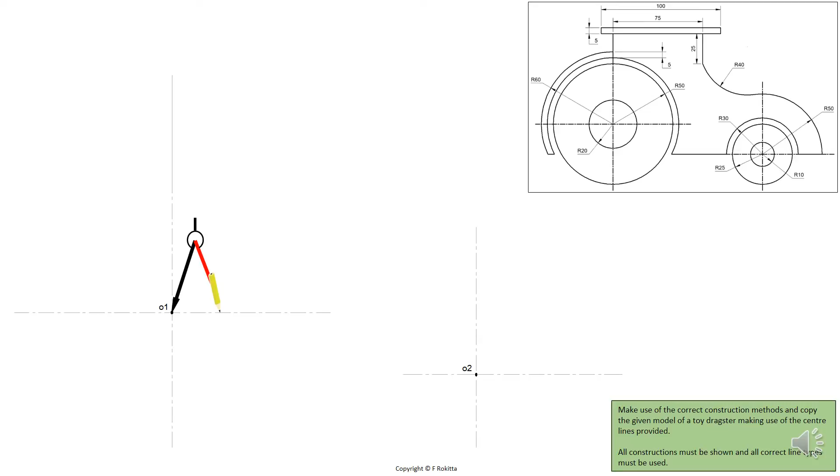Place your compass now at O1 and stretch it to a radius of 20 mm, which will represent the inside of the back wheel. Draw a solid circle. Place your compass once again at O1, stretch it to a radius of 50 mm and draw a solid circle that represents the outside of the back wheel.

With the next dimension, we need to make a small calculation. We see on the schematic that the outside rim of our hubcap is 60 mm. Then there's a 5 mm gap between the outside edge and the inside edge of the hubcap. That means we will need to draw a radius of 55 mm for the inside hubcap.

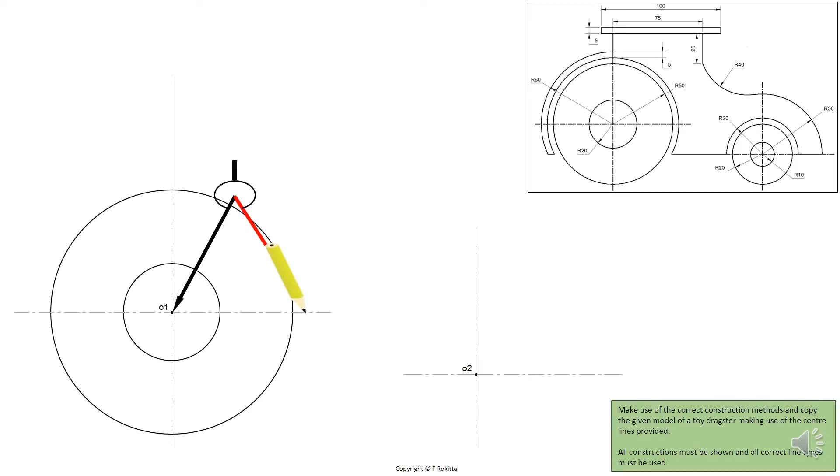Therefore, we are going to place our compass at O1, stretch it to 55 mm and draw the inside of the hubcap. Now we need to draw the outside edge of the hubcap, which is a radius of 60 mm. Place your compass now at O1, stretch it to 60 mm and draw the outside edge of the hubcap.

The next step is to place our compass at center point O2. Stretch it to a radius of 10 mm and draw a solid circle that represents the inside of the front wheel. Place your compass at O2 once more, stretch it to a radius of 25 mm as seen on the schematic, and draw a solid circle that represents the outside edge of our front wheel.

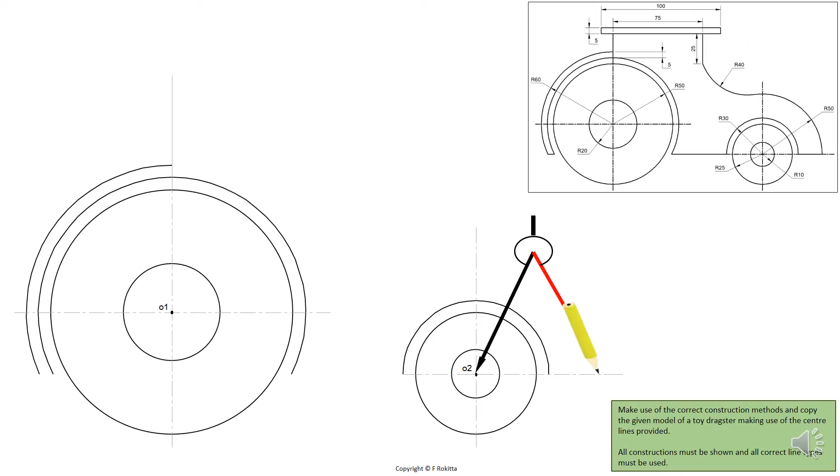The next step is to place our compass once again at O2, stretch it to a radius of 30 mm to draw the half circle that represents the inside of the hubcap of our front wheel. Also note that the half circle starts on the horizontal center line on both sides. The next step is to place your compass at O2 once more, stretch it to the full distance of 50 mm as shown in the schematic, and draw the front bonnet as shown here.

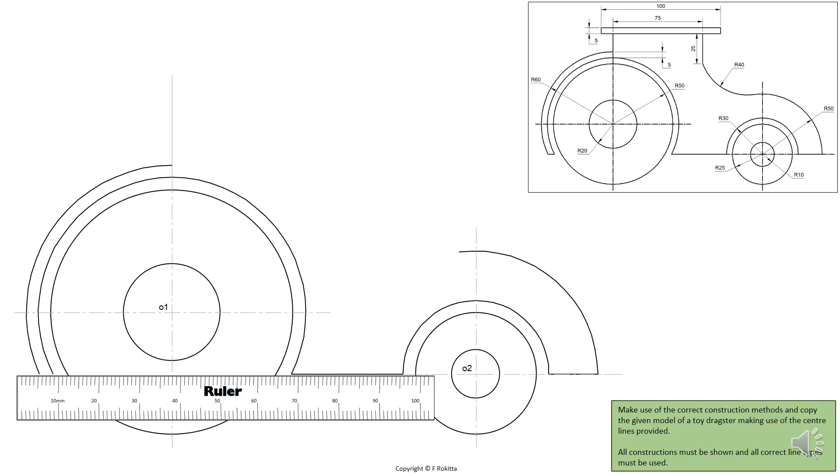Align your ruler with the horizontal center line of the front wheel and draw in the lowest end of the body of our car with a solid line. Also close the gap at the end of the car with a solid line. With the next step, we need to align our ruler with the horizontal center line of the back wheel. Also the set square with the vertical center line.

In order to draw the vertical line of the canopy at the back, we need to make a small calculation. Look at the 2D schematic view and see that the front height of our canopy, which is the total height of the canopy, is 25 mm. The back end of the canopy is only 20 mm because we needed to deduct the 5 mm between the wheel and the hubcap. Therefore, we need to draw, as shown here, a solid line with a height of 20 mm.

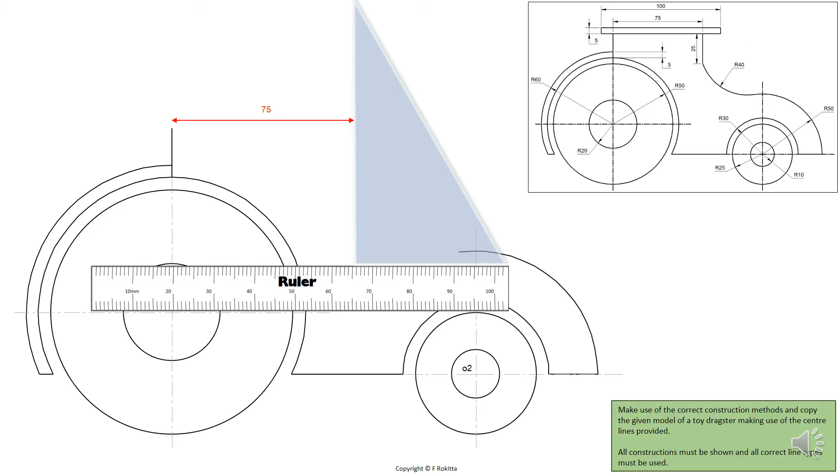The next step is to measure 75 mm with our ruler from the back line of the canopy to the front end of the canopy. Draw a solid line as shown here, 75 mm in between. Now that we have determined the front and back end of our canopy, as well as the height of the canopy, we can place the roof.

In order to place the roof, we need to halve the 75 millimeters, which is the total width of our canopy. This will give us 37.5 millimeters. From this, we will place a mark and measure 50 millimeters to the left and to the right. This will give us the total length of the roof, which is 100 millimeters. Then we will need to draw a height of 5 millimeters for the roof, as shown here.

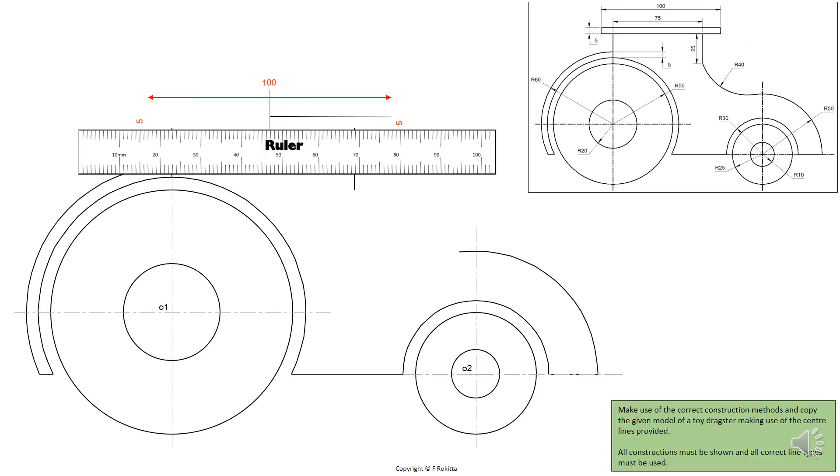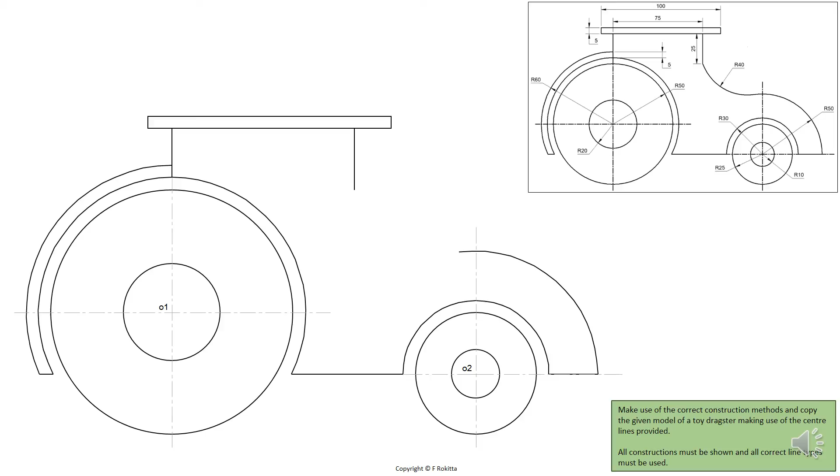To complete the final stage of our drawing, we are required to construct a touch arc. On the 2D schematic preview, we see that the touch arc has a radius of 40 millimeters and that it reaches from the bottom end of the canopy to the outer edge of the bonnet. To start the construction, we need to place our compass at the bottom end of the canopy, stretch the compass to 40 millimeters and draw a light construction arc as shown here.

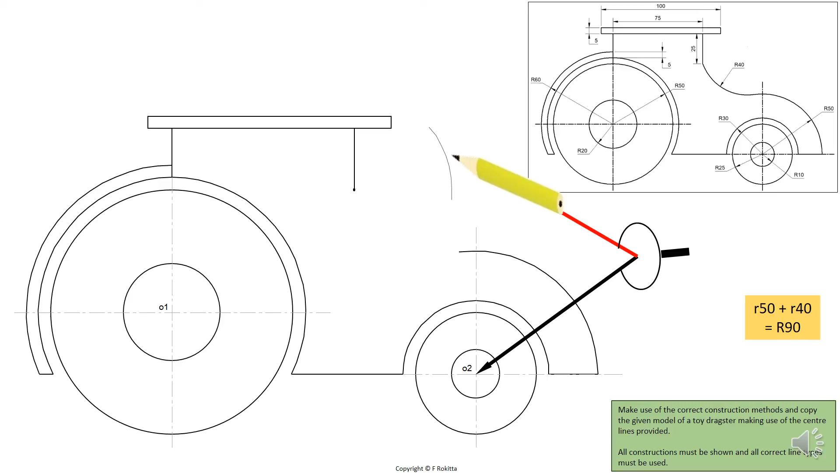With the next step, we need to make a small calculation. The touch arc is excluded from the bonnet and therefore we need to add the radiuses to one another. We need to take the radius of the bonnet, which is 50 millimeters, and the radius of the required touch arc, which is 40 millimeters, add them together, and then we have a total of 90 millimeters. Place your compass now at O2, stretch it to 90 millimeters, and draw a light construction arc as shown here. This arc needs to intersect with the previous one, and this will create a new center point.

Now, before we draw the final touch arc, we want to show where exactly the touch arc will meet with the bonnet, and therefore place your ruler at O2 and align it with the intersection as shown here, and draw a light construction line. Finally, we place our compass on the intersection and stretch it to a radius of 40 millimeters and draw the final solid arc. This will complete your construction.

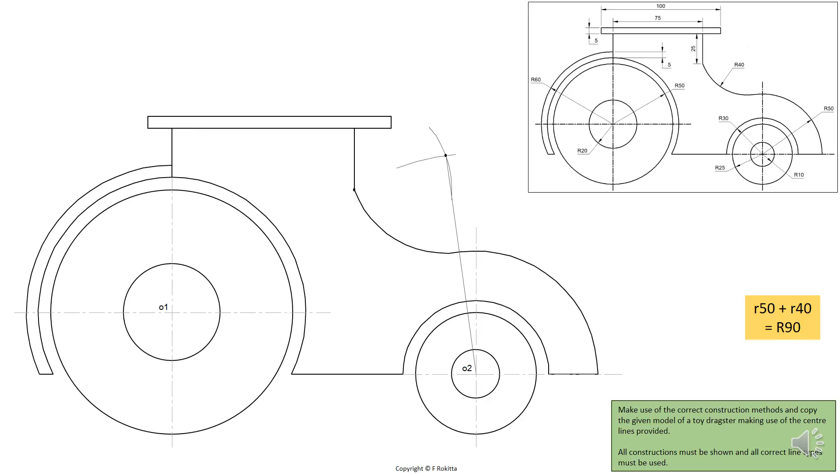Congratulations! You have successfully completed the tutorial of a combined constructions drawing of page 45 of the Technology and Engineering Graphics and Design workbook.